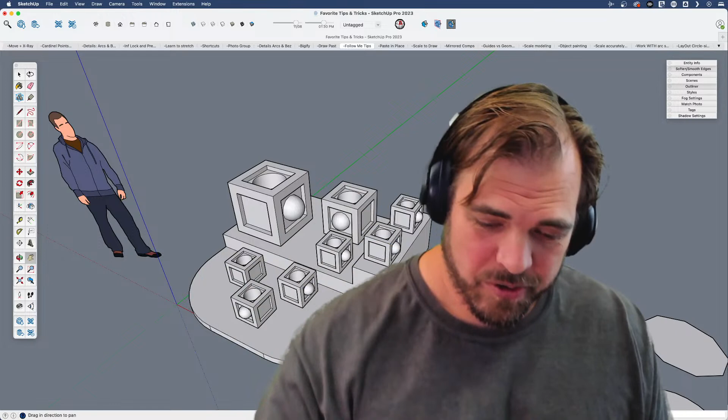And today, that's what we're going to try and do. We called this my favorite things. I started to try and list out a couple things that I thought, if you're self-taught, which many of us are, these are things that you might have missed, or if you've been using SketchUp a while, a lot of these will be familiar. A lot of these come up in the forums a fair amount, but hopefully there's a few tips in here that maybe are new to some of you out there.

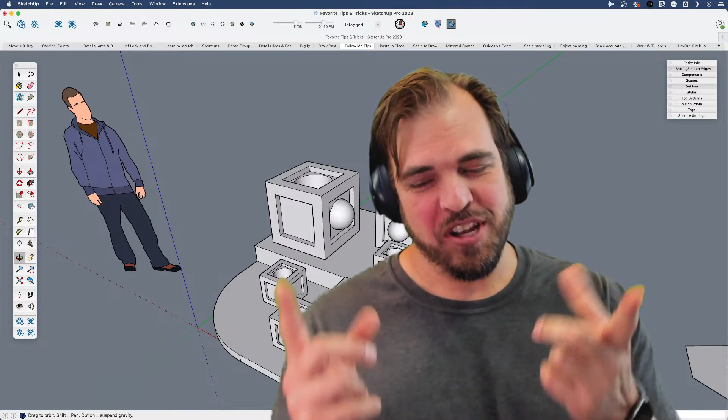You say self-taught, but this is a community where a lot of people can say that they're Tyson taught. So I'm sure we have a lot of those out there too. Well, thank you. That's kind of you. People are already asking if you intend to sing today. What are you talking about? You know, I may or may not have implied in the posts on the forums that you would sing your favorite things, and people would have to join the live to find out if that really happened. I have no voice like Maria. That would go poorly. Okay, so I won't promise singing, but I won't promise there won't be singing, if the mood strikes.

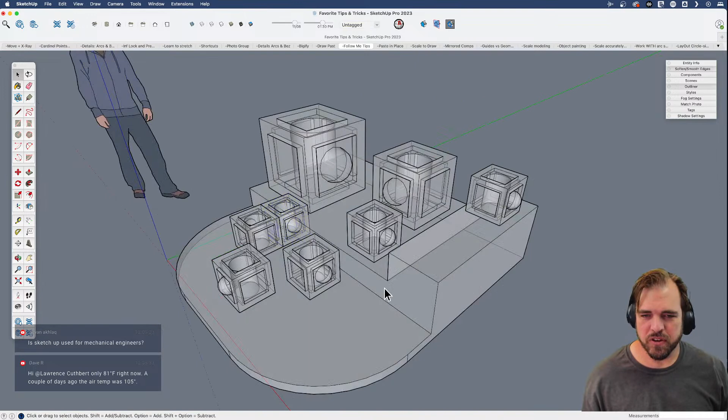A quick way to work around inference locking is to toggle X-ray mode. I've got this on a keyboard shortcut. If you toggle X-ray mode, it gets rid of that inferencing to a plane or preference for a plane, and you can just snap to anything, anywhere. That's the first tip that's really useful: have X-ray mode quick, easy access. You can snap anything anywhere and not have to worry about it getting caught up in the view. If I orbit, I might be able to get this to work, sort of, but X-ray mode will make that easy. That's tip number 1: turn X-ray mode on and off, especially when you're moving objects around.

Speaking of which, I have no segue for this. We got people coming at us from North Carolina, from Minnesota. One from a place I have not heard of before, so I'm probably going to say it wrong: Liège. Correct me if I'm wrong. We have people from Syria. The chat is just all over the place. We have a worldwide audience from Egypt as well, from the UK, across the pond as they say. We've got Houston, Texas, all over.

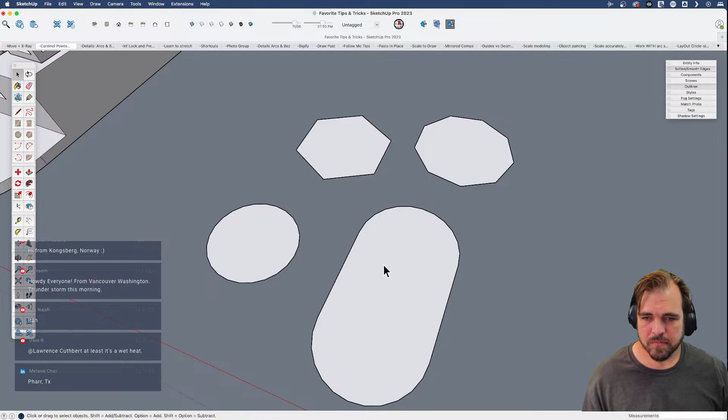Nice, thanks Donovan. Oh, Holland, Finland, Connecticut. You've got to reach, Tyson. That's so awesome. Yeah, well it really is. And I know you're not here for me, you're here for some good SketchUp stuff. Or apparently for Donovan, there's a big group of people here for your singing, so we can't count those people out. Oh man.

All right, so we're going to talk about cardinal points. This is one of those that, if you just learned to draw circles and arcs, you're like, cool, I can draw circles, maybe even change the number of segments, and you're familiar with that sort of thing, that's all well and good. Sometimes when you're just riffing and need to change the size of circles quickly, you'd have to get the scale tool or redraw a circle, but sometimes you can use what's called the cardinal points.

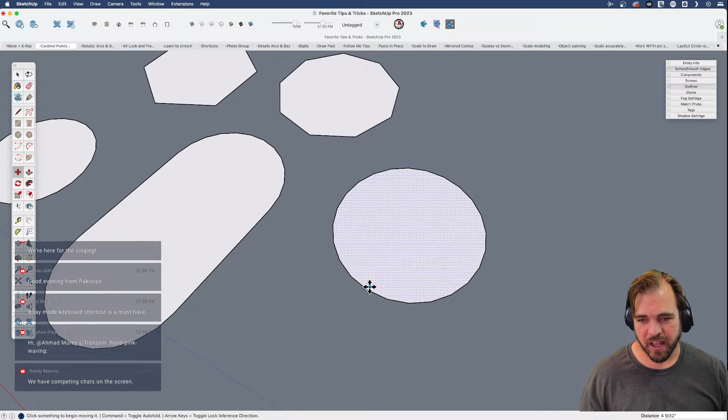If I hover over these polygons and circles with nothing selected, you see the entire circle is selected, but as I move around, there's a point where that blue highlighting disappears and I have just one point. That is the cardinal point. If you grab that point, you can actually resize a circle, an arc, or a polygon. If I grab this edge, it's going to move the whole thing, but if I keep moving around, a circle typically will have 4 cardinal points, one at each cardinal direction as you'd guess. Arcs will have 1, so I can resize these arcs.

Polygons, depending on the number of sides drawn, you may have to move around to find the one that will let you manipulate it, but you should still be able to find a point that lets you resize. You should be able to do this even if you've pulled some of these up into cylinders or objects. Using the move tool with nothing selected, if I have this circle selected and use the move tool, that's not going to allow me to resize this. So with nothing selected, as I hover around, I can create this as a cone. Over here, I could find the cardinal point between these two arcs because they're the same, see how it selects this line, and I could resize this whole face between the two arcs.

Somebody in the chat asks: when I select a circle and enlarge it, it becomes a polygon, how can I fix that? Say that again? When you enlarge a circle it becomes a polygon? Oh, the message says when I select circle and enlarge it, it becomes a polygon. How do I fix that?

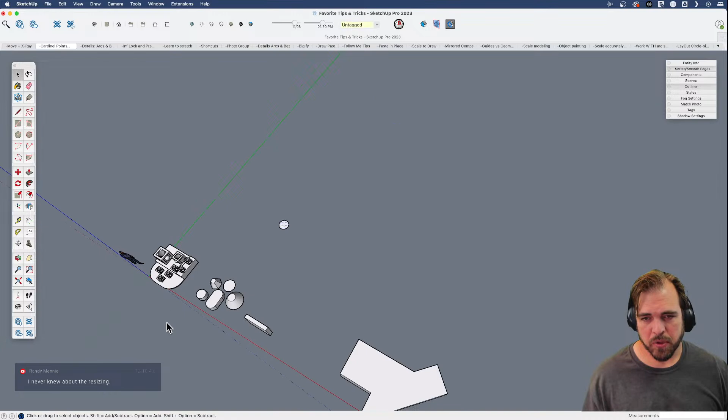So when I draw this circle, if I enlarge it, you'll find it's made up of a series of segments. That's true of anything, so you can change the number of segments. If you're trying to draw a circle that has more sides so it renders more as a full circle, by default it has 24 sides. As I'm drawing this, I could say I need that to have 60S, hit enter, and now it has 60 sides. The S is important, because if you just say 60 and hit enter, that's a radius of 60, but I was saying I want 60 sides.

I could also select this circle, go to entity info - and I haven't pulled it into anything - this only works on a flat circle, and say I need this segment count back to 30. Segment count in SketchUp is a critical thing to understand and work with. Don't work against it. Some people say there's no true circles, this is useless - not true, in many circumstances this works just fine.

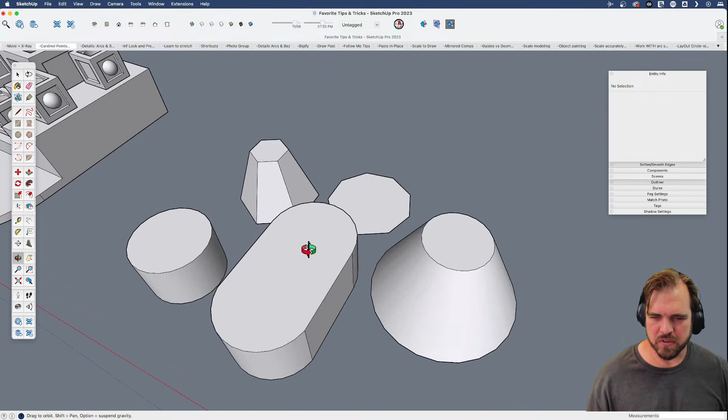Speaking of shortcut keys, since you're talking about shortcut keys, some people have chimed in to say what their shortcut keys are for specific things. What is your shortcut key for X-ray mode? Mine is Shift 5. I'm not going to justify it because everybody has their own logic. I'll explain shortly why that and a few others, why I chose those.

But yeah, shortcuts are fun. They're individualized. There's usually a good reason if you've customized them. I don't know the full story, but I know there's kind of an inside joke in SketchUp about how you use shortcut keys compared to everybody else. So I'm excited to hear the story behind some of these.

There's not a good story. I just have like 90% customized shortcut keys. I use very few of the default ones. Mostly that comes from an old habit of using other 3D software, and I translated them over. And half of it comes from often using a Wacom tablet, and I wanted to map all the navigation keys to the same spot.

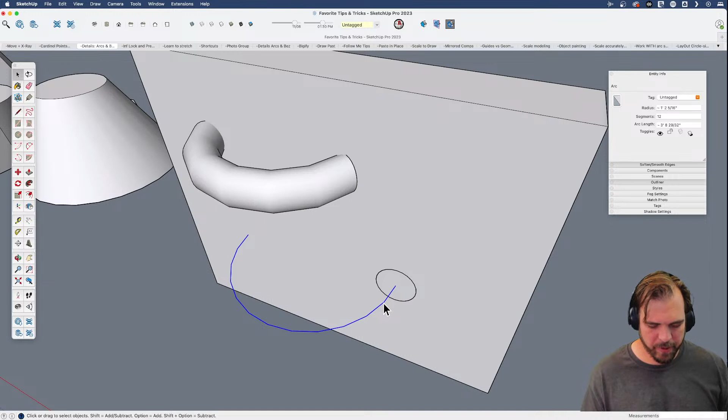The next thing we're going to talk about is Follow Me, and I did a skill builder on this fairly recently. If you're using it on a flat surface with an arc or often a Bezier or something, it's not going to meet up to that surface correctly. Let me undo, and we can see this, because essentially, even if we draw an arc, let me draw another arc.

I'll change the number of sides to say 30 sides, so it has a lot more sides than typical, because our default arc is 12. And I pull it out for a half circle. You're still going to have a little bit of a gap here, because this arc is not going to come in perpendicular, exactly perpendicular to the surface.

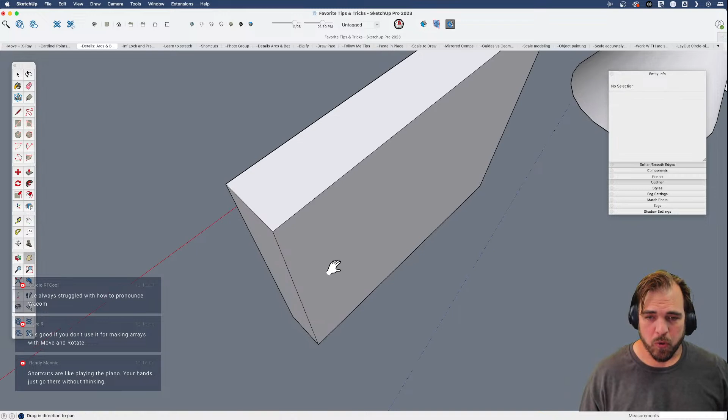It's always going to come in at a slight angle. So when you're drawing something coming from a flat surface, what you can do is draw just a little bit of a straight line. I'll copy that over, and that little bit of a straight line will give you the way to mesh correctly into a surface.

If you're drawing an arc and don't have room for that little straight line, just come in here, find the midpoint, and use that as your little bit of a way to get in there. That way your arc isn't bigger, but you can still draw in and meet up the wall. And like I say, that's true for Bezier curves as well - they'll come off at an angle, so it helps to have a little bit of a straight line to work with.

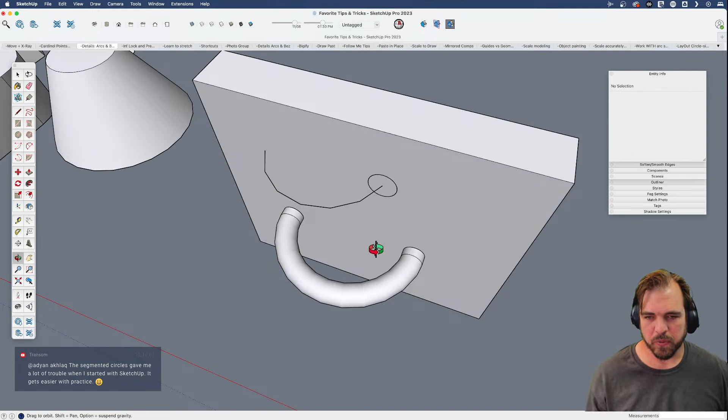Somebody in the comments said they've always struggled with how to pronounce Wacom. One of their reps told me: what do you do with the moles in the arcade? You whack them. So that's how you pronounce Wacom. I'll back you up on that, I've also talked to people who work at the company. Still, over the years I've pronounced it a variety of ways. I myself was in the Wacom camp for years until I met that rep, and now I have to remind myself, nope, it's Wacom.

Are you using a Wacom tablet right now, or is that something you don't use anymore? I don't tend to use it that frequently anymore, and I use a vertical mouse, which makes all the difference. I started using a Wacom tablet because of regular mouse issues, but the vertical mouse alleviates a lot of that. I do still love using a Wacom tablet though.

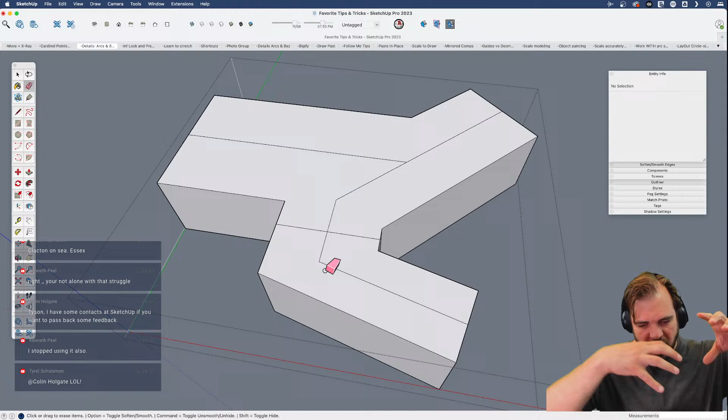The next tip isn't so much a tip as something we'll just go through. If you're new to SketchUp and new to the inferencing engine, one of the most helpful things is to draw a random shape, say this is a house, and draw some of the parts of the house off axis like this, then resolve the roof. This is just inferencing and inference locking practice.

Just to back up a bit, I was drawing this while we were talking about Wacom. This won't be a great resolution, but that's part of the point, since we just want to resolve whatever it's going to be. So I'll draw this, find the parallel over here, draw from this midpoint, find this, lock it and draw somewhere back here. I need a midpoint here, so I'll draw a line and then draw this line.

I'll hold the shift key to lock it, then touch this edge so it lines up there, and draw back to here. Then I'll draw a line from there and erase it to merge it, extending this one past the edge. That's one of the tips we're going to talk about too - I love just drawing past an edge and using the eraser to clean it up. It's a fast way to work. Now let's draw in a couple ridge lines.

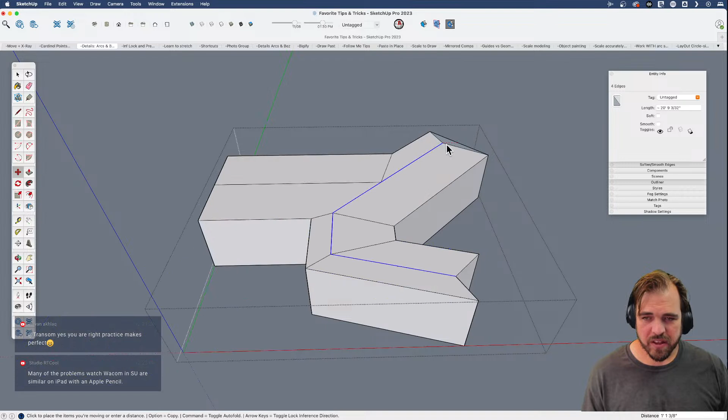Erase these and see what we get. Select these edges, use the move tool, find the blue direction. It's okay, this is kind of messy, but that's the point - some of it worked, some of it didn't. It could actually work if I select this one too, since I'd forgotten it. That's a little better. But I'm not going to worry about roof pitch or anything - the whole point is to now fix some of this roof.

So I'll use inference locking. Lock back here, then I can erase that. Because of this weird way we did this, we've got this weird triangle. If we needed that pitched, how would we go about that? Let's just find where the intersections are. I'll start an edge here, hover over this roof, hold the shift key, and now I'm locked to that surface. I'll draw some random shape while still holding shift, which keeps me locked to that surface, and do the same thing over here.

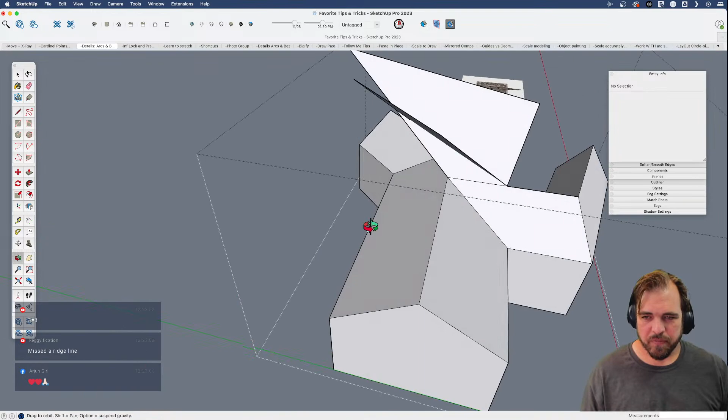Find that blue on face, lock it, and come back to here. That will give me those two intersections. And actually, with this third one, we should be able to just find where it all ends up. Interesting, I would never have thought about doing this like this. I'm not saying it's the best way.

This is just a way to practice inferencing, inference locking, you can lock. For those curious, yes, I fall in the newer to SketchUp camp, whereas Tyson falls into the boring old guy, very professional camp of SketchUp users. This is one of those things where you do an exercise one way and then think, could I do it differently? I'm not sure, but I'll try. That's why I like doing random roofs as practice for inference locking.

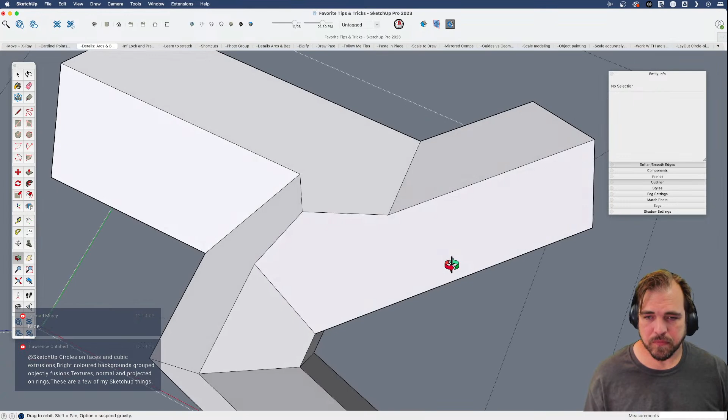If we have a little bit of leftover geometry in here, another useful thing for X-ray mode. Let's do a little bit more.

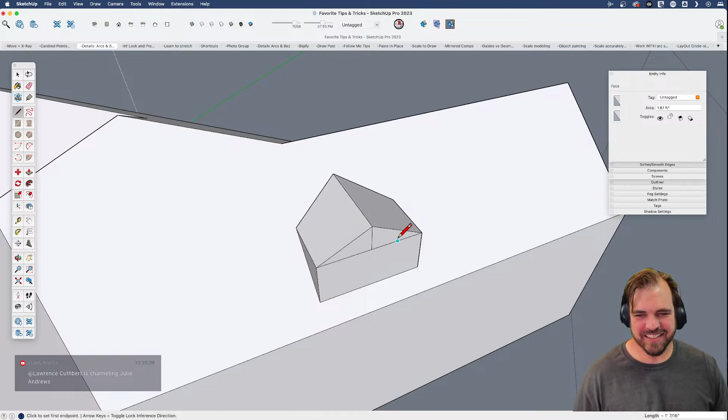Lawrence in the chat, this is fantastic. He wrote his own lyrics to SketchUp's favorite things. This is so great: circles on faces and cubic extrusions, bright colored backgrounds, grouped objectly fusions, textures normal and projected on rings. These are a few of my guess would be favorite SketchUp things. I hope I enunciated that right, that's fantastic. I tried to come up with a little jingle of what I thought the SketchUp lyrics for that song should be. You won, those are fantastic. Nice. Wow, normal and projected on rings. Okay, textures normal and projected on rings, these are my favorite SketchUp things. So choice, chef's kiss, Lawrence. Fantastic, that is fun.

All right, let's see if we can get that to weld in. Okay, all right, so we've drawn a little dormer. Again, a nice exercise. Down here, we'll draw.

Here's another sub tip while dealing with inferencing that many of you will know. When selecting a path for follow me, often if you don't want the whole surface, the best way to select just the edges is to double click on a surface, then hold the deselect modifier and get rid of the edges and surface you don't want. So I want all of this except for this side because I'm going to do something different this way. It's just a quick way to grab edges, as opposed to that, which is not slow, but that's a quick way to grab some edges: double click and then deselect what you don't want. Sometimes that's faster.

So take that, offset. Let's move this whole doorway so that it's in line with this dormer. But what would we do? We can hover over this edge, because again, this is not on the axis. So I'm going to hover over this edge, hold the shift key. Now I'm locked to it, and then I can pick anywhere on this door and line it up exactly.

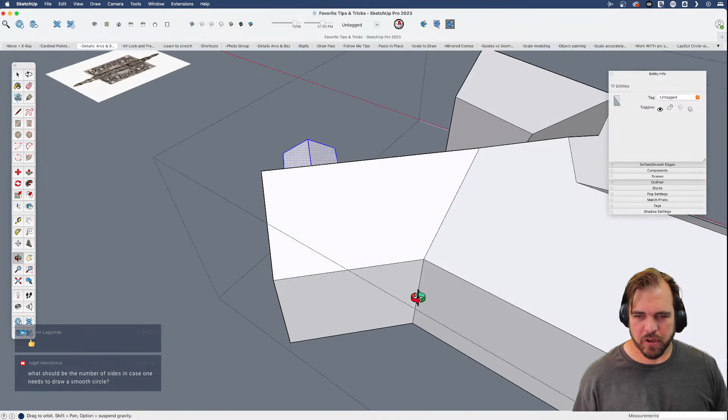Let's say we're drawing, I'm going to grab this and move it, but I'll lock it so that we're moving. Over here, we're going to do the same thing, create a door. But here, if I'm trying to line up with this dormer over here, I can do what I just did. So I've locked to this edge, then I click on this point to start moving it, but I've got the shift key held down to lock this.

Because I was so used to using the shift key, I created a whole bunch of shortcut keys associated with it. So while I'm locked, I hit 5 and I hit X-ray mode, or I hit 1 - this won't do anything right now, I'll show something else - and it'll toggle hidden geometry or hide rest of model or similar things. I used all of these common in component editing. So shift 1 is hidden geometry, shift 2 is hide similar components, shift 3 is hide rest of model, shift 4 is close components, shift 5 is X-ray mode, stuff like that. I did that so while I'm locked like this, I can easily toggle those other aspects on and off and stay locked. That's why. See, now I understand. This is great.

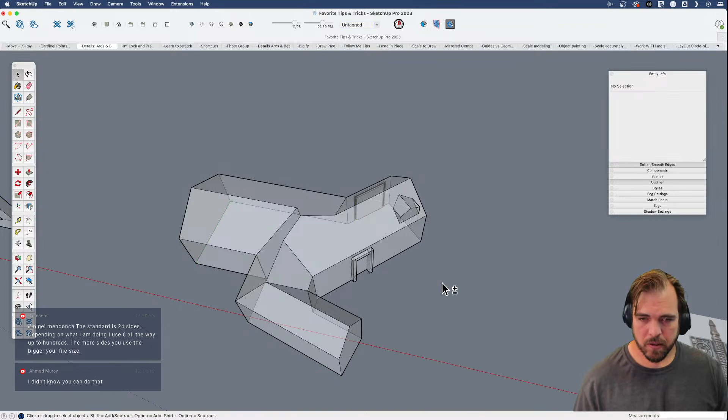Again, different workflows; people who are more comfortable using the arrow keys may not find that. But for me, because I'm so used to using the shift key for locking for most of what I do, I just found it very useful to associate some of these things with the shift key. So that is that. Oh yeah, and we've basically covered this.

Another useful thing in SketchUp, if you haven't done so already, is make sure you...

Oh no! No, that's for cowards. I see you also like to live dangerously. Learn how to select. Granted, with what you're doing, I don't think it's totally imperative that we save the model. Correct? I saved this model from the start. So, no, we're safe. We're safe. Okay. I don't want to have to go again. Saving is for cowards. Yeah. That needs to be a shirt for Aaron right there. Oh, and I count myself a coward. Of course I love saves.

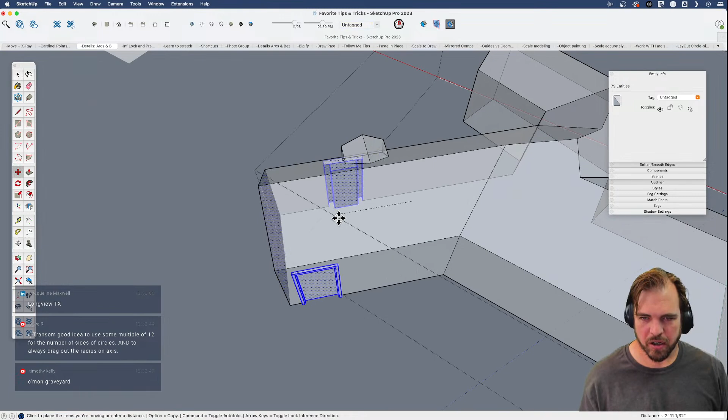Learn to stretch geometry. Learn what you can select and how you can move geometry and manipulate geometry in line with other geometry. And you want to do that plus this surface plus this door, but leave the dormer there, right? So that's another one of those things: you can manipulate a lot of geometry if you learn to make a good selection and how you can stretch at least along straight edges.

Okay. Oh, I don't know if you have this in your upcoming arsenal of favorite things, but a comment came in about graveyards. So if you weren't going to talk about graveyards, when we get back here to paste in place, I'll own up to my graveyard habit. All right. Graveyards. That is definitely one of my favorite things. That's a good call out.

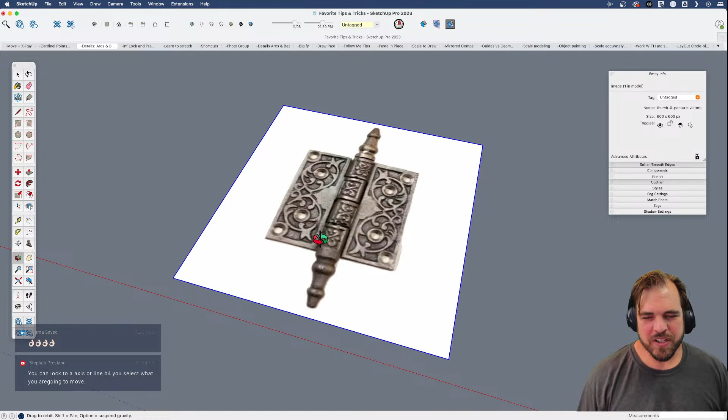If you're new around here and you don't know what the term graveyard means, we'll call it a term of endearment for my habit of copying geometry, making iterations, and then changing my mind. So making a new iteration and changing my mind and making a new iteration. And by the end of it, I've got like 10 versions all in the same model. So I've got a graveyard of changes, which is messy, and you walk away from it, and a week later you come back and you're like, what was I even doing? I don't know which is the current file. I don't know which changes are the most recent. And you're in trouble, but that's a graveyard.

Oh, I was thinking something else. Maybe boneyards? What I thought is you have all of these shapes in a model, but you make a copy of that or a component and you lay it out on a flat surface somewhere, like behind the model or beside the model. So if you need to go in and make changes to a particular component, you could find it in the graveyard or the boneyard. Am I thinking of a totally different thing, or are we talking about the same thing?

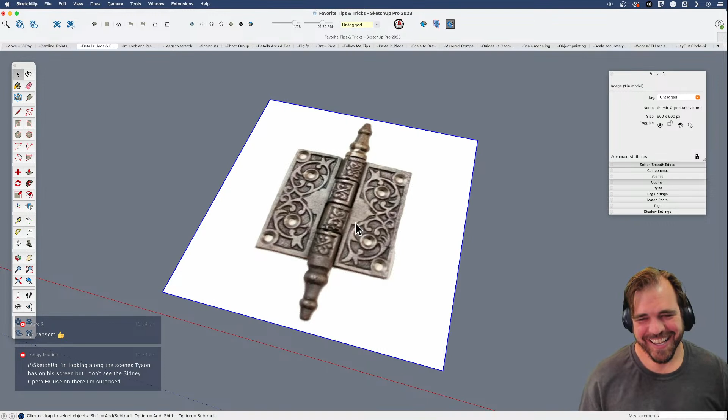No, I think you're thinking of something different, and I think that is useful if you're making an assembly and you just want all your pieces easily accessible. I mean, you could find them in the component browser, but if you just had a whole bunch of greeblies or something. But no, I suspect, at least in reference to previous stuff that we've done, my graveyard is my bad habit of leaving all my changes along the way. Gotcha. Yeah, that's just that for me at least.

This tip is when you bring an image in. I just drag images in, and I don't import them as photos, but it's doing the same thing. If somebody knows differently, if there's an advantage to importing, you can import images as photo match, as textures, as an image. When I'm doing a reference image, I will just drag the image in, which is the same as importing as an image.

Here's the thing: when you import as an image, though, I want to trace over this, and I don't want this part of it to get in the way. And I've got a lot of space to work on this one, but sometimes you don't, and so you're manipulating your model, and then you accidentally erase your reference image.

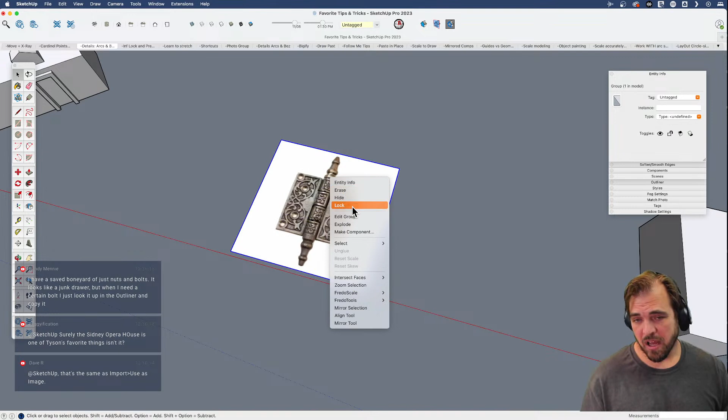So it's nice to be able to lock this image, but if you bring it in, you cannot lock it as is. So one of the things that you might try is you say, well, that's fine, I can explode this. And now it's exploded into the geometry with this texture applied to it. And I'll just group this. And then as that group, I can lock it. Perfect, right? Now I can't erase it. I set that up. Don't do it this way. We're going to show you a better way.

But the problem for doing it this way, so now I'm going to group my geometry. I'm going to come in. As soon as I edit my group, textures go away. And this is true even of other textures in the model. And this is in shaded with texture display mode. But if I came in and applied some texture on here, whatever it may be, as soon as I edit this group, textures go away. But I want that reference.

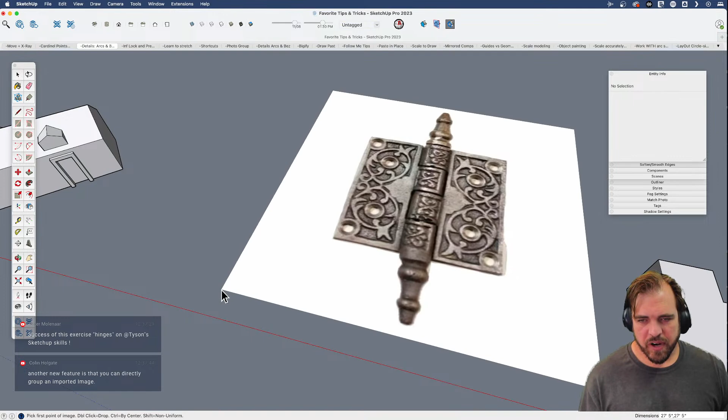So here's what you do instead. Don't explode it. We'll just get rid of all of this. Let me unlock it. Get rid of this. When I bring an image in for reference, like this, I just group it. So I'll just draw another line over here, totally discard it, like it's not necessary. Sometimes if I'm mirroring something, I'll draw a line across and select those two. Doesn't matter. As long as you have one little extra piece of geometry, you can group those together.

And now that it's a group, I can lock it. But I never exploded it. It's not texture. It's still an imported photo. And so now when I come in and I make this group and I come in to edit the group, it retains the photo. And I love doing it this way. Then I turn X-ray mode on and I have this really nice view for tracing with the image preserved, but locked. So I can't erase it either. Hope that makes sense. I've shared that one before too.

So like I say, reference image, don't explode it, just group it with any other piece of geometry, and as a group and as an unexploded photo, it will still show up when you're editing other groups and components.

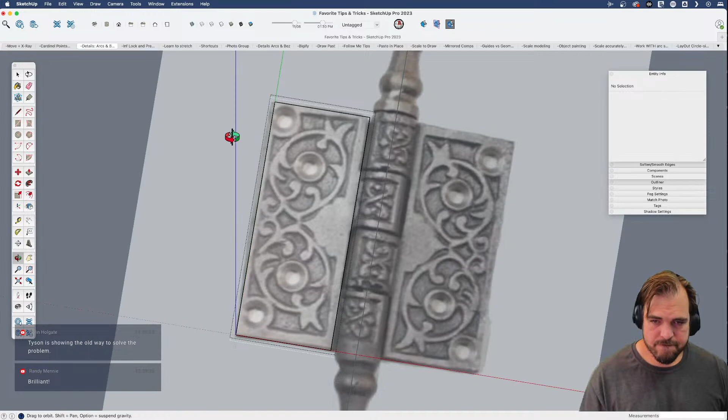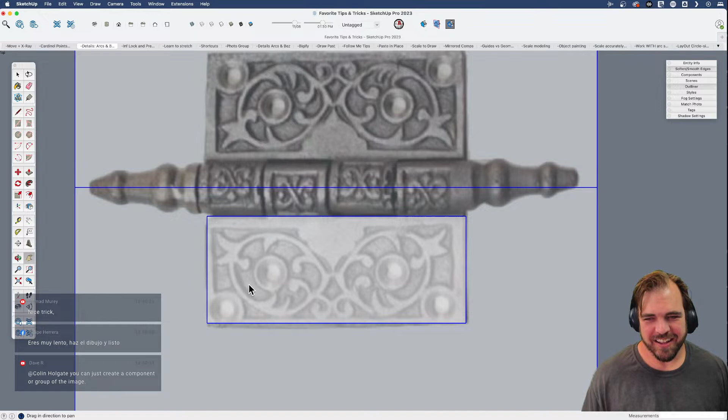There may be a story behind this, but there's the comments in the chat about the Sydney Opera House. And surely the Sydney Opera House is one of Tyson's favorite things. I'm assuming that's in jest? You mean like Notre Dame is one of Aaron's favorite things? Peggy says, surely the Sydney Opera House is one of Tyson's favorite things, isn't it? Peggy, I thought we were friends. You know what? No, it's not, and I will never do it again. But we did it once, and I'm pleased that we at least did it once. But no, it's not one of my favorite things. You never want to model the Sydney Opera House live in SketchUp again. That is not an easy thing to do. But I mean, yeah, no, absolutely. My favorite thing, my favorite.

Okay, well, let's throw it out there. What are some of the memorable lives that have occurred? They're probably the most memorable ones, or the most difficult, the most dramatically failed ones. But I don't know. What do you guys? What were some decent lives that we've done in the past, if any come to mind? We've done so many. Do we have a count for what the total number of lives is that we've done on this channel so far? I don't know, but we've done them. I started joining 2 or 3 years ago, and Aaron was doing them before that, so we've got like 5 years worth.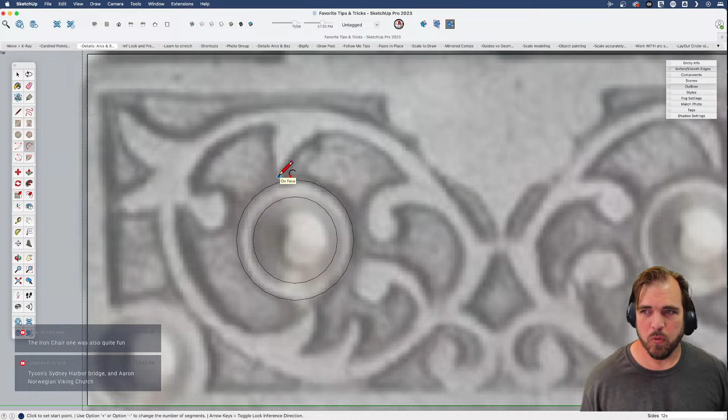The Sydney Bridge. Oh man. That was my first. No, it wasn't my first. That was an early one for me though. Woo. The Eiffel Tower. That was back when I was more naive and thought I could get more done in the time than I could. In 2 hours. Yeah. Is the bridge that they're talking about that weird suspension bridge? It's the Sydney Harbor Bridge. It's right by the Sydney Opera House. I don't know what else to refer to it as.

Okay. Somebody says the iron chair was really fun. Oh, Aaron did the Game of Thrones chair. I think that's probably what that reference is. Somebody else chimed in saying the Norwegian Viking church. That was a cool one, like Stave Church something. That's an Aaron. Yep. Nice.

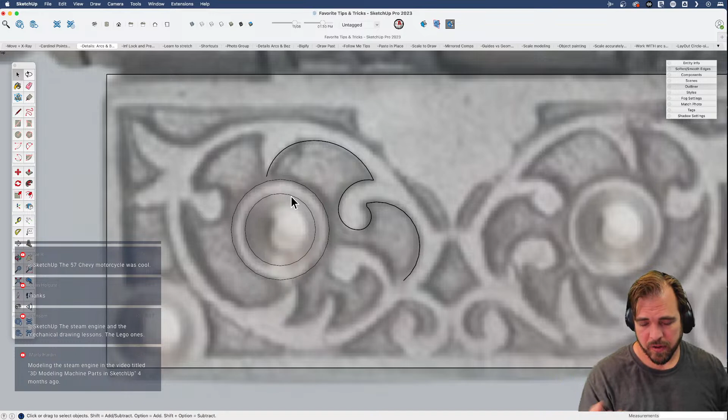I'd love to hear some more, but what I'm doing with this was just to show when you're drawing details, a lot of curving details. It may not be installed by default. I don't remember if it is or not. I think I went and grabbed it. But there's some really powerful Bezier tools out there. Fredo's created some. I haven't wrapped my head around those. I think you can go back and edit those. So if this was something you did a lot, it would be worth looking into some extensions.

But the native Bezier extension from the SketchUp team, aside from just arcs, is really great, and I just got a shortcut here, because with arcs, you have to be careful that you're not creating arcs at a point that you can't. I could not, with our arc tools, accurately represent this because it's kind of two arcs, not one. So I would do this portion, and then I'd have to come in and do a little thing here, especially if you want continuous smooth curves. The Bezier tool, draw a Bezier curve. Again, it's SketchUp created.

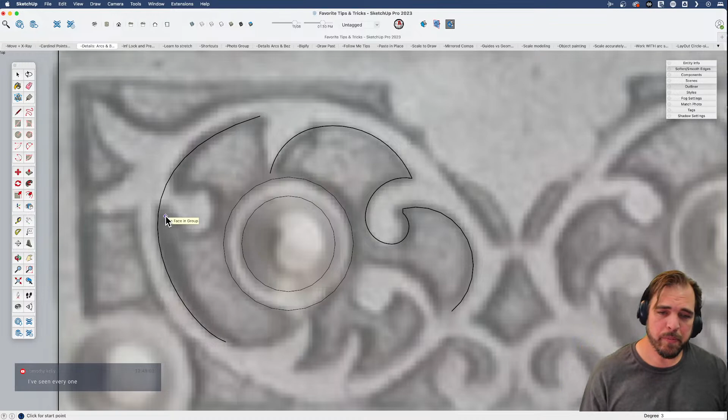But you might need to install the extension. I apologize, I don't remember. But with that, I could come in and draw more complex curves that might meet this better than the native arc tools. And the thing to remember about this too is when I'm drawing this Bezier curve, I will start in here and be like, okay, that's the curve I want. But by default, there's different points of control, and I have these 3 points of control. I'm like, this last one's tripping me up.

Keep in mind with the Bezier tool, this degree down here, I can be drawing and be like, oh, I want just that one. I just want to create the 2 points and 1 degree of control, or 2. I don't know actually what this means, but I'm going to change it to 2, and that way when I draw this Bezier, I'm just using 1 point here to draw it instead of coming out this way, coming out this way. That's useful for other reasons, but the Bezier tool is another great tool for creating some arcs that are not exactly perfect curves tangent to both ends. So when drawing some details like this, remember that the Bezier tools are your friend as well.

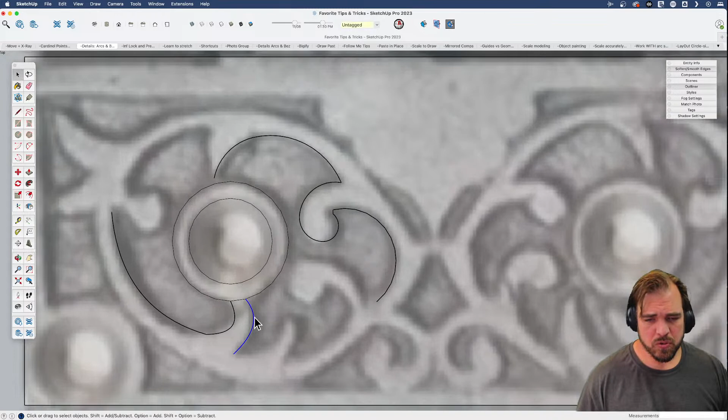Also with arcs, one of the downsides of the Bezier tool is you can't control the number of segments, because if you're drawing this with arcs, you always have to keep in mind that this is something very small, but if I need to turn this corner, well, this arc certainly doesn't need to be 12 sides. So then I just arc 5, then coming up, whatever it is. And then maybe this one is going to be 8 sides. It's always just a best guess, but with the Bezier tool, I believe it's 20 sides every time, no matter what. So just one of those things. Personal preference.

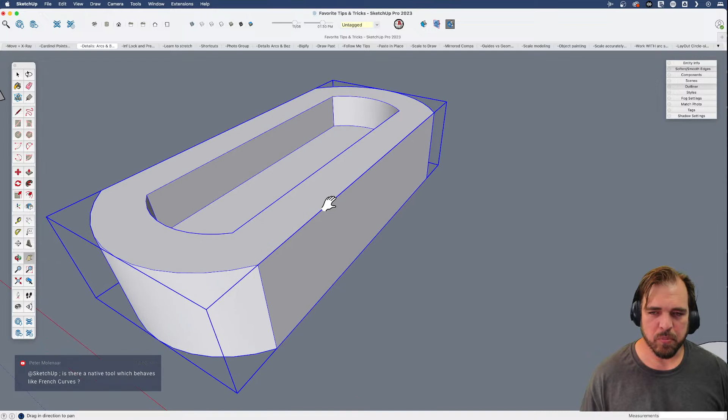All right. Let's get back. Some people are chiming in with other votes for their favorite live. Yeah. Your lightsaber. That one. Oh, I haven't done. Was a pretty one too. Ty, our very own Ty, chimed in to say that he was the guest host for the scale figure video. So whoever called that guest host out, that would be Ty. And then we have a couple of people that actually voted for the Steam engine. Mechanical drawing lessons from the Steam engine. The Lego one. What? Okay. Well, Aaron's done mechanical drawings a couple times, but I guess specifically the Steam engine. Very cool. Somebody talked about the animated trench run from Star Wars. That one was fun. I need to learn some better animation tools so we can do that one even better.

Peter from the chat is asking, is there a native tool which behaves like French curves? The Bezier tool is going to be the closest one. I showed how we can draw Bezier, one direction, 2. You can actually draw a Bezier with more. I could turn the degrees up to 4. And I've got 1, 2, 3 points of control. So experiment with that. If you really want a lot of control and the ability to go back and manipulate a curve, look into Fredo's.

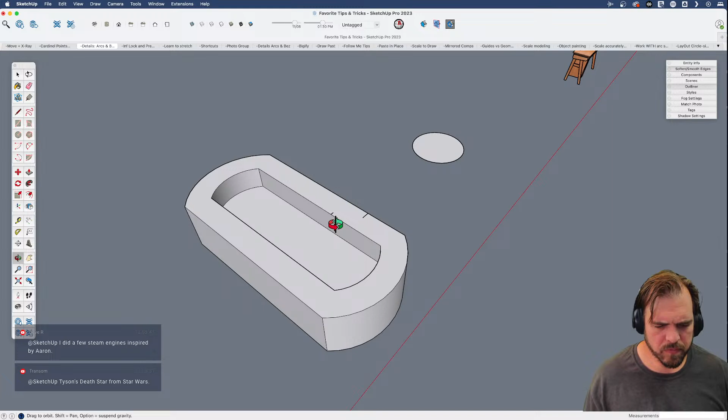Help me out there. Is it Curvizard? Fredo's. It might just be his Bezier tools. Somebody in the audience will know. But there is a more powerful one. It's much more technical to use. Yeah, I have to make a confession around that. I have not used any extensions in SketchUp. I don't know if that's a good thing or a bad thing, but I have not delved into the world of SketchUp extensions. That's the deep end of the pool for me. Well, Bezier Spline and Bezier Fredo Spline. Fredo Spline. Thank you. So check those out. Excellent.

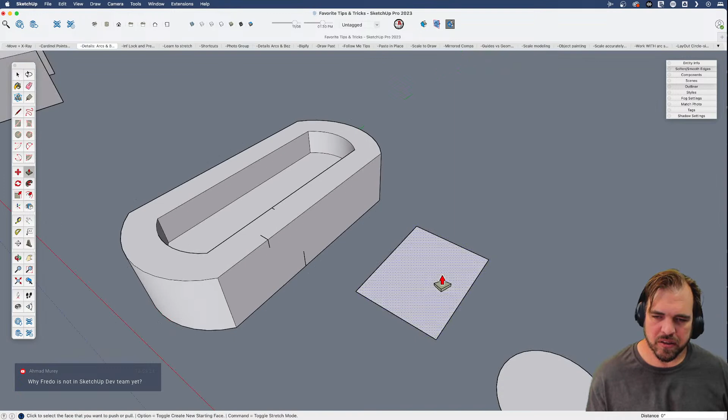This one, what I'm setting up here is a reminder, this was a skill builder recently. Sometimes you have a shape where you don't have an obvious place to put a follow me shape inside, right? So follow me, we need the path, we need the shape. But in this case, unlike something like this, where we say, well, the chamfer corner can just go right here. That's nice and simple. On this one, we didn't have any flat shape to do that with. You can still create it, and what we need to do is just draw.

So I will hide a surface or two and draw the shape I need. And then if I unhide these, I'm going to hide this one. And again, I'm not deleting it, I'm hiding it, which for me is a keyboard shortcut. That way I can unhide it in a moment. But I'm going to select this top surface, go to follow me, click here.

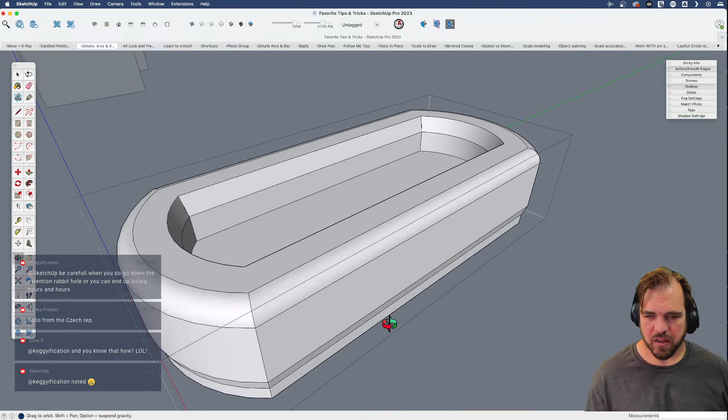So then it created that chamfer. I'm going to select it again, follow me, click here, created that one. I'll select maybe this bottom one, follow me, click. So I've created all of these, and then I'm going to unhide that surface I hid just so I could see my shapes.

But again, if you're creating objects that have some curves and you don't have a good place to create a starting point for the follow me tool, draw your shape, put it into place, and then sometimes you can hide one of the surfaces to allow you to select another path and still use your follow me tool. So let me know if that makes sense.

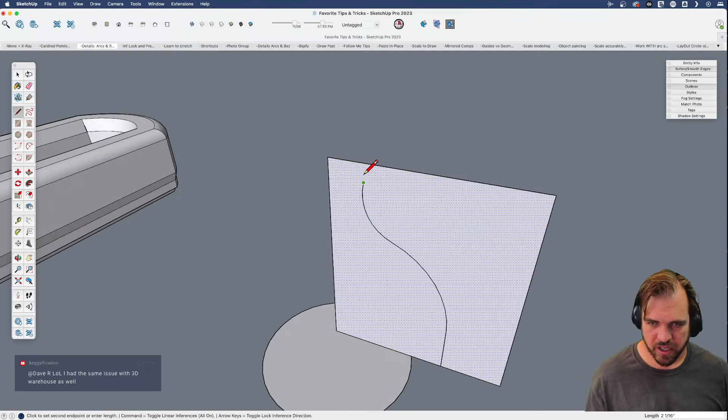This one is one that I talked about a lot, Eric's talked about. If ever you're doing a complex shape, especially one that's going to involve arcs, you need a throwaway shape to work on. Drawing arcs out just in the free space, it's so tricky to do. It's really hard. There's no need to do it because you can just draw a throwaway surface.

And create your more complex shapes, and then you're good to go. Oops, I didn't create an opening.

This one I've shown a little bit before. This is one of those things too. I could bother, I just love being able to draw past and erasing. Draw past, and then erase. Anyway.

So that's follow me.

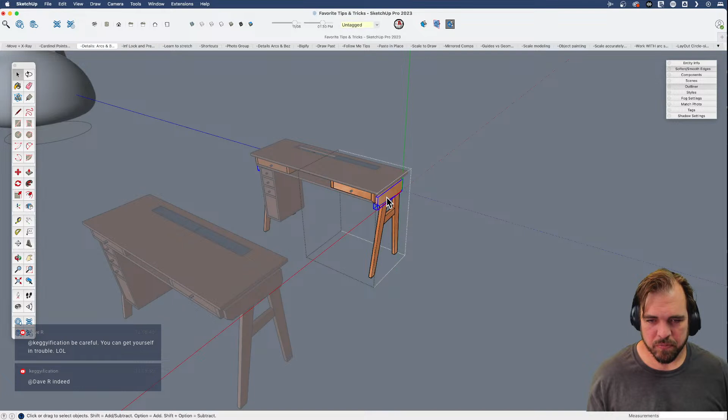Paste in place. This is where, because this is where I will come in and be like, okay, I want to make changes. So I will come in and I will try to remember to make, right, this is components, or actually it's groups or something. This is my bad group and component behavior. But I want to make this unique and then come in and make some changes. But I don't always remember to make something unique. So I'll make a copy then, make some changes.

I forgot to make this unique. And I make some changes here. Extend this out to here. Extend this one. Using locking to keep that angle. And...

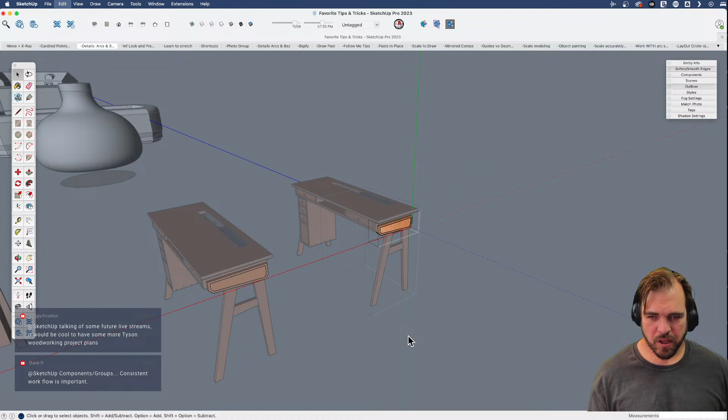Then I come back and I'm like, I didn't make it unique. I was just exploring a change. I didn't want that to change. So that's when you take something, copy it, undo it, and then paste it in place. Edit, paste in place, or paste in place. And because we had copied it and because of the changes, it makes this as a new component.

This is also really useful, not just for fixing when you mess up your component behavior. This also is just very useful when I want to draw some geometry first.

Speaking of that model you're working on, somebody chimed into the comments talking about future live streams. It will be cool to see some more of Tyson's woodworking project plans.

Thank you. I did build this out. I built this desk for my daughter. This one came to life. Most of them don't come to life. Most of them overwhelmingly don't come to life. This one actually did, and it was so cool.

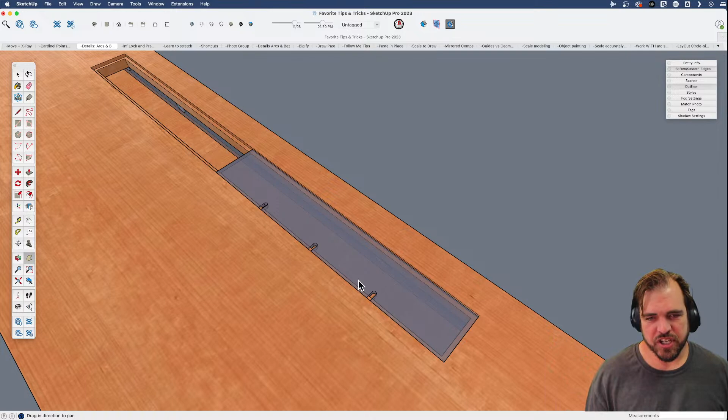Was that a COVID desk? It was, it was a COVID desk. Yeah, I did build in as well this upper area that has semi-storage, but I also put a sound, whatever the right term is, an LED strip that goes in here that responds to sound. So you can change the colors, or you can just play music and it will start pumping out different colors. And then it's also open down here, so the colors. So it's very fun.

Just as a side note, let me hide this. I do this a lot where I'll make a change, something like this, and then I'm going to cut it out, come inside the component and paste it. So paste in place, many of you will know this already. It's so useful either for correcting mistakes or drawing something outside of one context and then dropping it into that context.

While we're here, while we're on this one, I'm going to delete this. Another thing that I tend to do, and this can get you into trouble, but is, again, when I'm just iterating really fast, I like to make mirrored components, especially of furniture.

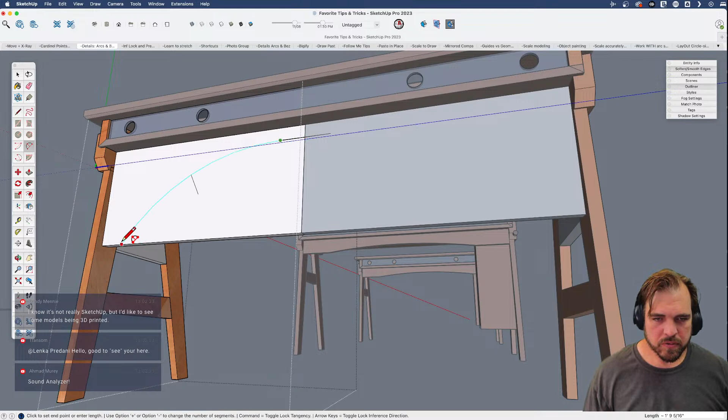And then to visualize it correctly, if you have, so I'm going to... these are two different components, but I want them to read as one. I want this to read as one panel. You can go into your component, select those interior edges, and hide them.

Right? You can't delete them, or that would remove geometry, but you can hide interior edges and then create a seamless sort of version in the middle. So anytime you're using mirrored components, you can hide interior edges and create a visual one piece.

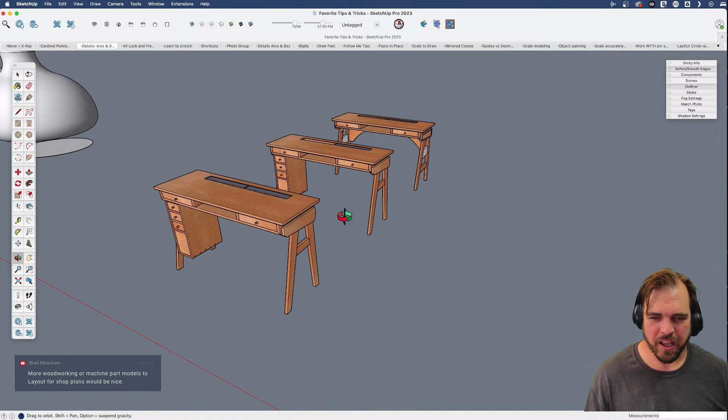This, Donovan, is my graveyard. I have this on so many of my projects where I make a change, and then I make a change, and I make a change. And I come back and I don't know which one is the most recent, I don't know which one I like. That's my graveyard. It's like an adventure in your own models.

Some people are chiming up in the chat saying, I know it's not really SketchUp, but I would like to see some models being 3D printed.

I think we've done a live about things being laser cut, correct? We did do a laser cut live. And we're actually going to do that again because we have a different laser cutter at work we want to showcase, since it'll be a bit of a different workflow.

For 3D printing, we can model for it and send it to the 3D printer, and we can talk about slicer settings, but that gets out of the realm. And anyone who knows this knows we cannot 3D print in real time. We might be able to finish something small, like a tiny dice. Or do it like those 30-minute cooking shows where we have a finished model ahead of time.

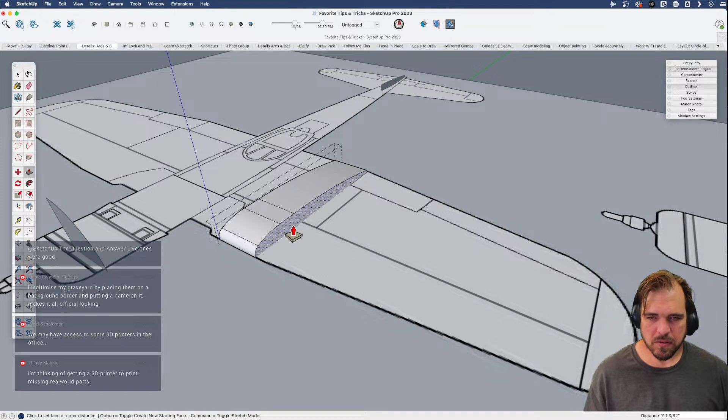We definitely can talk about considerations for 3D printing, and Aaron has written a book recently on just that. So if you want his best expertise, there's a book out there he's written. For those who don't know, Aaron is becoming a more prolific author in terms of SketchUp, so if you haven't seen already, there are a few books he's written that can help you in your SketchUp journey. I'll plug Aaron's book, go get it, help support Aaron. He's a good guy, we like him. Most days.

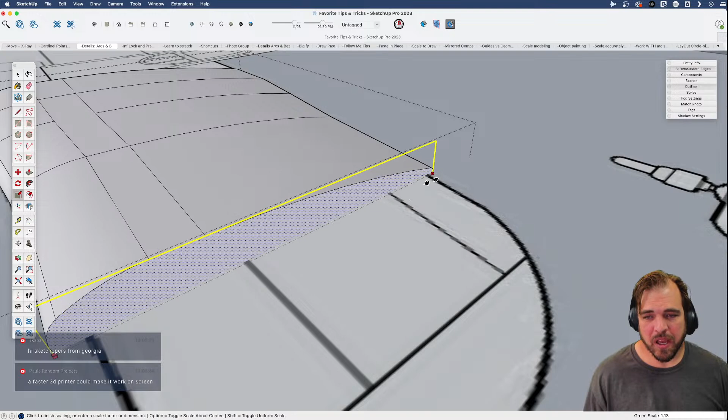Somebody chimed in saying question and answer lives, so let's entertain that for a second. I think that'd be great to do, I think we'd be game to do it. This isn't pure cynicism, but this has actually happened a few times: you do it, and then the question is, hey, how would you model the Sydney Opera House? And the answer is, I don't know, we can't do that. So as long as we get questions within the realm of stuff we can answer in 10 minutes, I love the idea, but sometimes we have to set the right expectations. Or we could just gather all the questions ahead of time and sit and answer them. That would be a good live to get everybody on the team on, right? It would be, potentially, we could hand it back and forth. I'd be curious if anybody has examples of what they would ask.

Ty jumped in and said we may have access to some 3D printers in the office. We do, we do.

Since Ty is with us, Ty is our scale figure still for the SketchUp for Web version. I don't know if there's a different version for the paid or free version, I don't know. I saw the weirdest thing on some SketchUp Reddit post recently where they're like, what's with the SketchUp team, what's going on here, and I couldn't reference it, they were showing this picture of Ty and I couldn't understand what the reference was.

Ty is wearing a shirt that's like an inside joke. Have you seen it, Donovan? You'll surely know the reference. Are you talking about the dinosaurs? Talking about the dinosaurs. Yes, I know the reference. Does anybody out there not know the reference? I almost want to bring it up. If you go to SketchUp for the Web, our good friend Ty is wearing a shirt with a Tyrannosaurus and a Stegosaurus, I believe. A nice little movie reference.

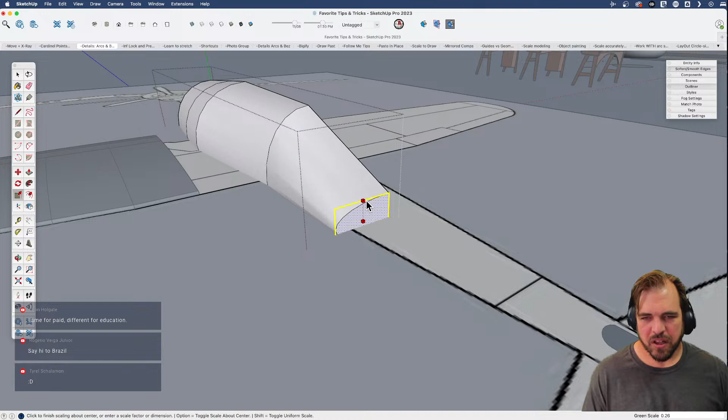And sometimes, like I'm doing here, you want to make sure and preserve that inside, because I would just mirror this. But the scale modeling method, if you haven't tried it, give it a try. So I will leave it at that. You know, scale modeling.

Speaking of mirroring, I do have to say personally, one of my favorite things recently is the mirror tool. I love it. Right now I'm working on a playhouse that's pretty good fodder for the mirroring tool, because it's pretty uniform in terms of shape, design, and accents. So I find myself more and more often using that mirroring tool and being so glad we have it, because it's come in handy quite a few times recently.

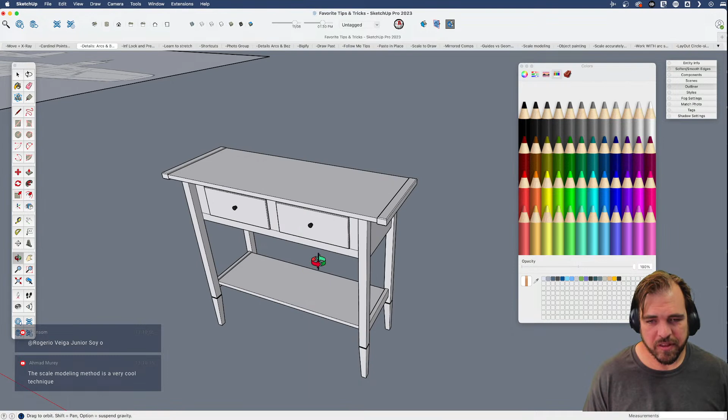I love it too, man. Agreed. That is a recent tool that I think they implemented really well. Totally agreed.

This one is just a thing to be aware of. When you're painting colors or materials in SketchUp, if you've used it, hopefully you know that everything in your model—and to me this isn't one of those could-or-couldn't, take-it-or-leave-it rules, this is a super fundamental always rule—needs to be grouped into an object, object being the generic term for group or component, one of the two.

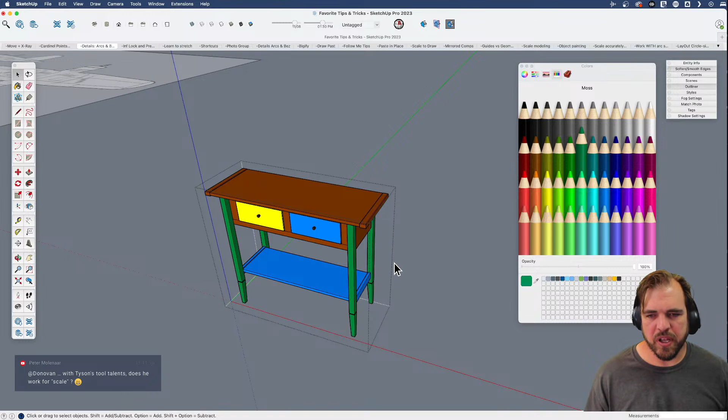You can paint objects. So I could paint all these different things. If I select all these and then group them into one larger piece of furniture, which I could do, and then go to paint this blue, only some of the stuff turns blue. And if I come in and this is already painted, but I paint it green, all of a sudden all these things turn green. This is one of those things that once you've wrapped your head around the nature of objects and components, it makes sense.

But it can get really confusing, because you can paint the container and you can paint surfaces. And when you have multiple nested groups and components, you can really get confusing about where your paint is—is it on the outer component? If I select this whole thing and go to entity info, it shows this group is blue, even though some of these colors are inside. If I go inside here and select this, it shows this group brown. This one still shows as brown, the original color, even though now we've painted it green.

I'm not going to say there are some people who will say you should never, ever paint the outer container—I'm not going to suggest that should never happen. Just know what you're doing. Especially if you hand models back and forth on a team, have some sort of rule—either we only paint surfaces, or we only paint one level deep—because it gets confusing when you select something, paint the surface, and now it's different versus the container.

We used to think that if this is a component, you could create and paint the container of the component something different. We used to show that as a way where, hey, you can keep the component behavior but have different materials showing. I think that's confusing too. Just be aware of it—I'm not going to say how you should do it, just that it's one of those things to be aware of.

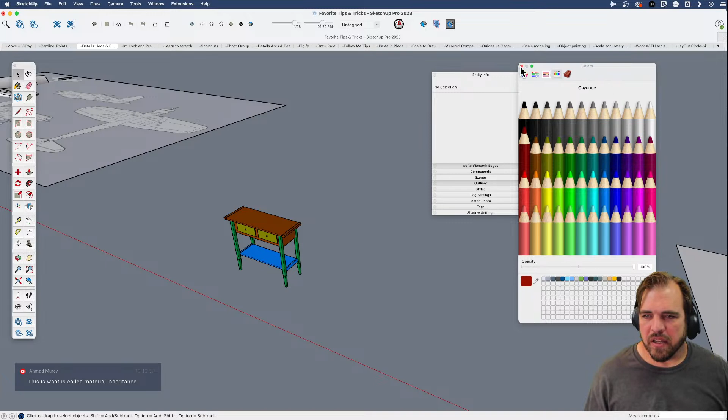All right, yeah, I do have to make a correction—got called out in the chat. It is not the mirror tool, it is the flip tool. You and I both stand corrected, because I was agreeing with you. We do.

This next one—I wish, as we go through these examples, some of them are very generic because this stuff just comes up, and it's hard to know when it may or may not be useful. This one's a very generic example: sometimes you've drawn shapes, not necessarily circles, but something you're trying to scale, and the scale tool works on a percentage.

If you go out there, you can find tips and tricks for using scale more precisely. This is a simple one: if I want to scale but need to keep the circle as a circle, and scale it to these lines I've just drawn, just remember you can tap the shift key to scale uniformly. So I could scale it, and as long as I scale from one of the ends, I can make this accurate to some reference edges.

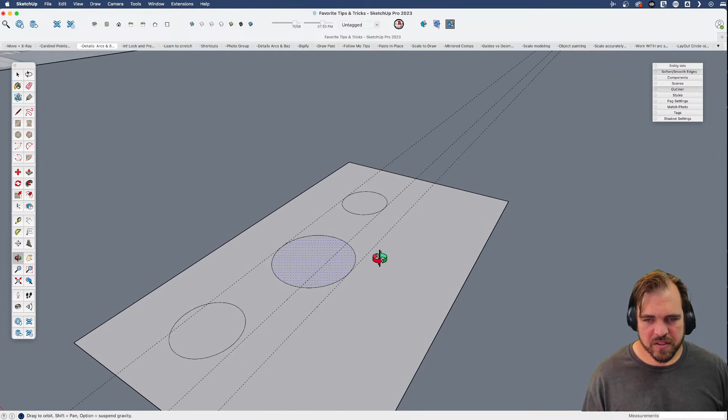This gets trickier once this is 3D, because here you might, if I scale and say okay, I want my guidelines—sorry, these guidelines are at 24 inches and 12 inches and such. In this case, when I select this and use the scale tool, I might pick this middle grip because I'm thinking of my 2D version, and press shift so it scales uniformly. But here we're warping the geometry outside, because by picking that middle one, even a little bit, it's going to mess up that surface it's attached to.

So keep in mind that in this case we may still be able to make this work by using some of the other scale grips. If I grab this one and press shift so it's uniform, because that other base is on my surface, I can now scale down to this edge. Except it's not snapping there, and that's going to bring up my next point.

We can make it do so, and I'm going to show two examples of this. Guides are awesome. If you've used guides a lot, you know that sometimes you can snap to them and sometimes you cannot. So we're going to explore when you can and can't snap to a guide.

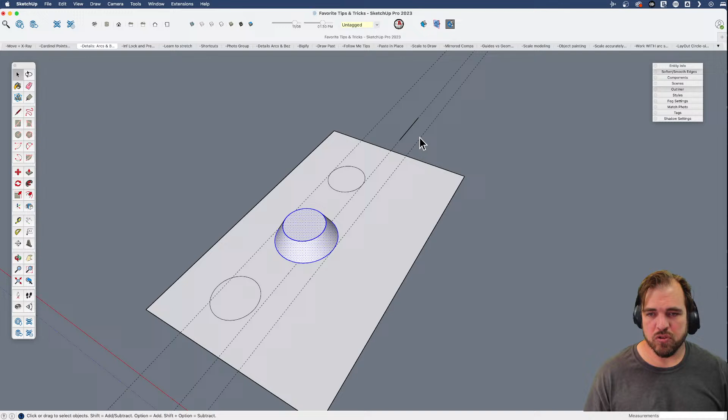But when it seems to not be working for you, you just need to draw some geometry on the guide. So in that case, I'm going to grab this, press the shift key, and then I will scale to...

You know what, I ran into this earlier too. Watch, I'll make it work. It'll still work, I need to draw a vertical edge. I think that will work. Shift. Oh, I thought it would work. Well, bummer.

This is why we do this live, for moments like this. I thought this would work for us. If this won't work, then... I just made this work the other day, I must have done it differently.

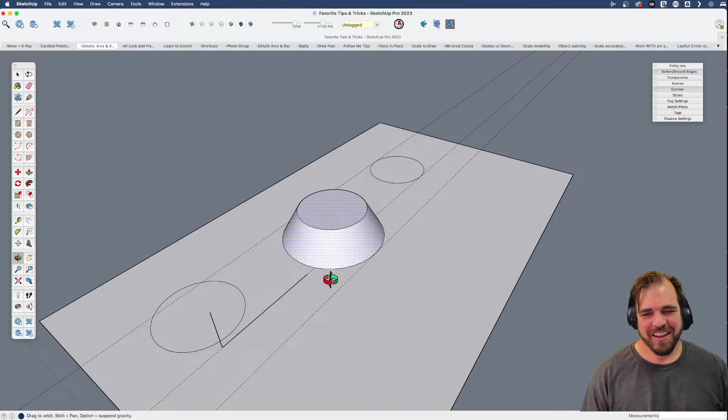Okay, bail out, bail out. Let's go back to this idea. Sometimes you can scale accurately using references, and depending on how you do it, it may or may not work well for you. Somebody said I might need to zoom into the line. Okay, we'll try that in a second.

The guides are awesome, right? If your guides are on the same plane that you're drawing on, you can snap directly to guides. I can snap to this guide.

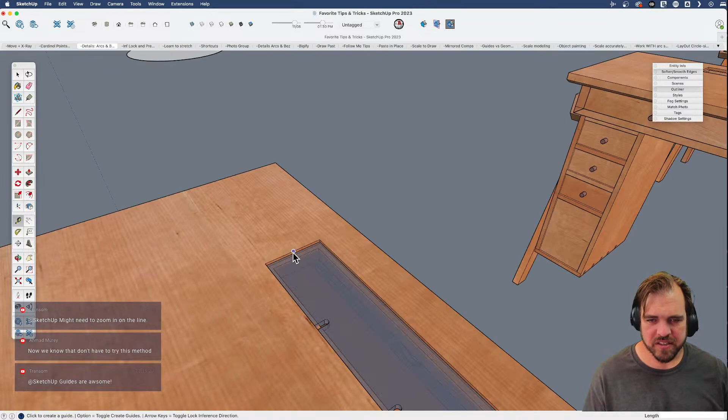But if I drew these guides, like I've got this little piece of tinted glass, but it's inset just a little bit, and my guidelines—I want this to be 4 inches in from each side here and here. It doesn't matter if this was higher or lower. Once your guidelines aren't on the surface you're trying to draw to, I can't snap to them. See how that's causing problems.

And if I draw a line, how far—it's not going to snap to that line. So sometimes your guidelines can be really helpful, but if you draw just a bit of geometry, that's when you can snap to anything, no matter if it's higher or lower. Whereas, like I say, guidelines, if it's not directly on the plane you're working on, you can't snap to them. Still useful—just remember, sometimes you need to create some little throwaway geometry.

To that point, another quick way to draw that I find just useful is the scale tool. Sometimes I don't want to create guidelines, so I will just draw a rectangle and use the scale tool to scale it to stuff that I know I need. So that's also helpful.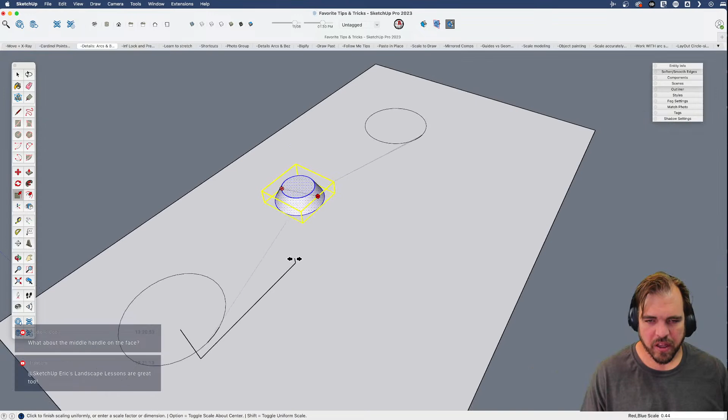I'll try zooming in, see if this works, or we'll try. I wonder if I need to select it like this either. That's funny, I thought I just got this to work the other day. So the setup might work under a little bit different finicky circumstances. Let me try grouping this.

Somebody says, what about the middle handle on the face? Either one—the middle handle on the face, that's in here.

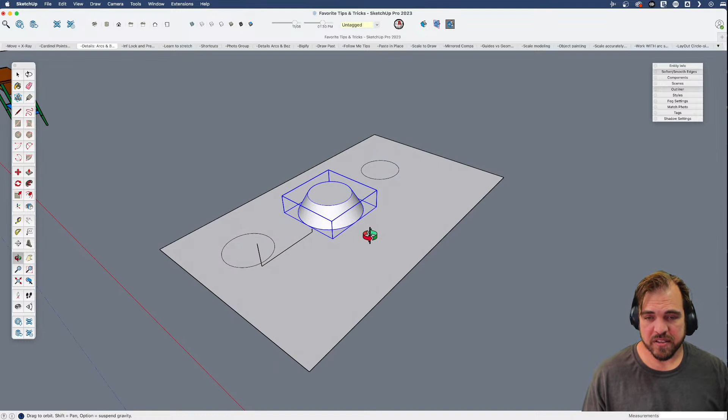Ideally, because I was trying, I just deleted all my guides. I was trying to preserve one side and scale the other one. So that's what I was trying to do. Let's not belabor it. I'm sure some of you out there could figure out a way to do that. But yeah, it's not impossible. The whole point being that the scale tool, if you create some guides, you can scale accurately in some circumstances. Leave it at that.

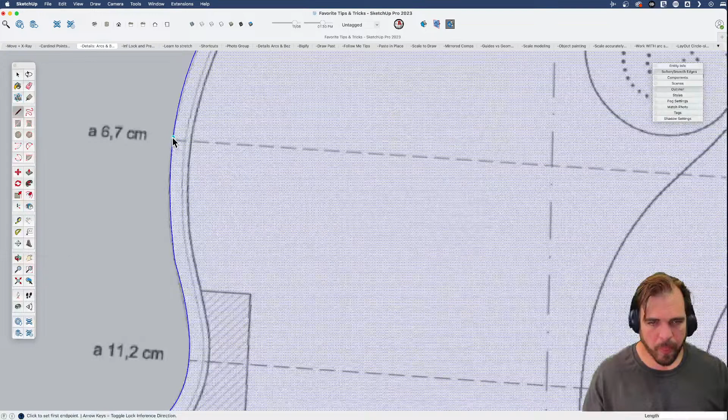And sometimes you'll bring something in like this, and I will model it really big, and then you need to scale it down. So let me create a line. So I'm going to group this, go in, edit it. Is this 6.7 centimeters? Measure that. 6.7 centimeters. Oops.

This is another one of those things going all the way back to when we were talking about the Wacom tablet. I could never get this scaling with the tape measure to work, because if I move my mouse right now, it sort of messes it up. You've got to be able to measure and let go. I could never let go of my tablet, the pen, and not mess it up. Yes, I want to resize that, and now I have a very accurate model. So resizing with the tape measure tool, definitely a favorite thing.

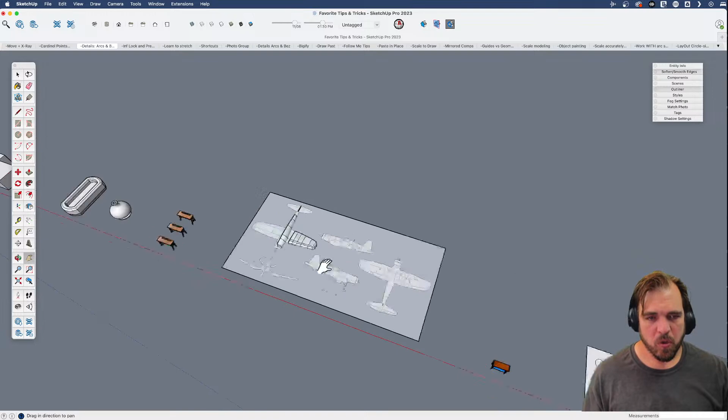Speaking of, I skipped this one over. I won't belabor it. I know most folks will know this one. We'll give Dave R the credit. It is generally known as the Dave R technique, Dave Richards technique, that you can take an object, and this might be a little box, a very ornate box that is only an inch wide. And if I try and draw arcs on this while it is only an inch wide, SketchUp is going to start balking at me. And if I try and use Follow Me or Intersect with Model or Solid Tools, SketchUp is at its core an architectural modeler. It likes larger scale.

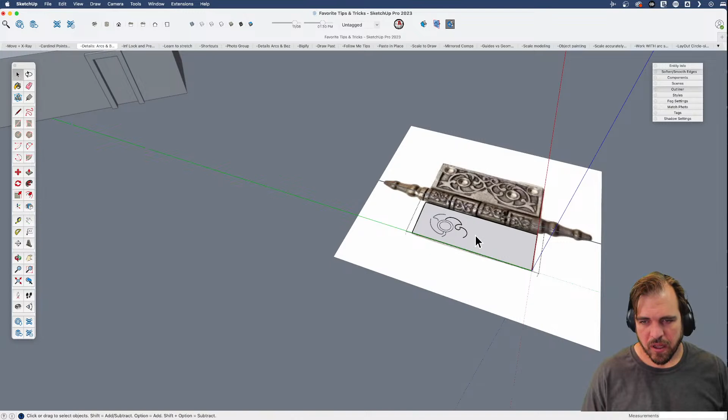So what we're going to do is make this a component. Oops. And we're going to do a couple things here that we just talked about. I'm going to take these edges, copy them or cut them, paste them in place. So I want to keep working on this. But I also know that the real scale of this should be only, let's say this is like a really small box hinge, 1 inch.

So I'm going to do a couple things here. This is still a component, and this is not necessarily how you would set this up, but just so that we can do this, I'm going to select this edge, this component, and I'm going to group them, not make it a component. And so right now I'm not editing the component, but I'm going to use that trick we just talked about. Measure this and make it 1 inch. And that way my component is down at this scale too.

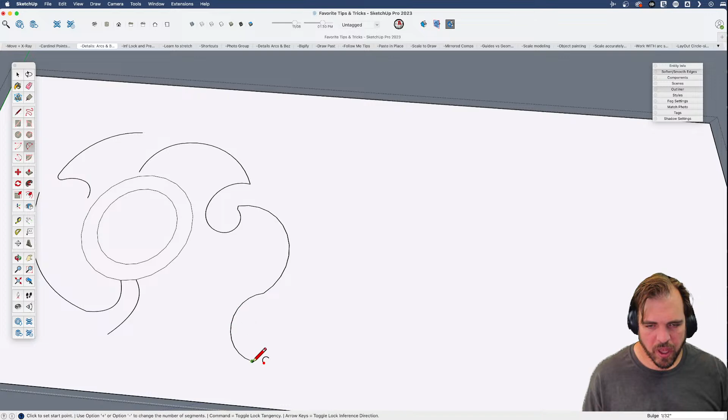And what we'd see at this scale is if I'm trying to draw arcs and I'm adding a lot of detail for whatever reason, it may start balking at me. Anyway, you have to say yes, yes. As we go farther and farther down that path, it would have trouble. But up here at this large scale, we have no trouble. We do what we want to do. Continue on our merry way, and at this small scale,

I set this up so badly. Is that it? I thought this was a component. I thought I had made it a component, but you know what? I don't ever remember the component dialog, so maybe I didn't. Now it's a component. The point being, doesn't matter. I can scale the outer thing, make changes, and it's going to happen on the small version.

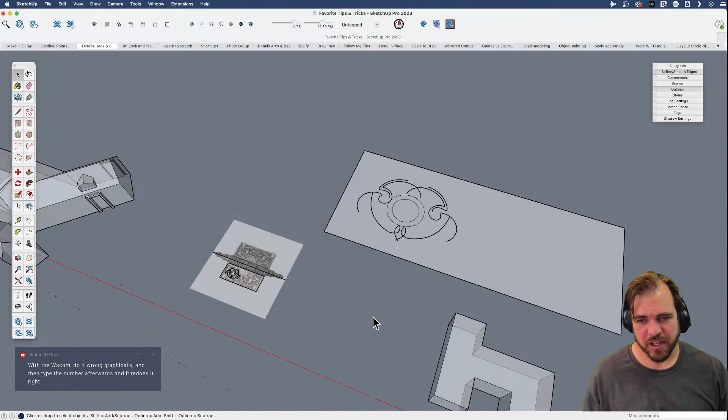So useful to draw. Yeah, somebody typed in the chat, do it wrong graphically, and then type the number afterwards, and it redoes it right. Yeah. Anyway, that concept, favorite technique. Again, credit to Dave R, I think, for propagating it most prominently. That you can take something, scale it up, make changes, and even though you couldn't make them directly on the small version, for whatever reason, you get all the detail on the tiny version as long as you make changes to a larger version of your component.

I think let's call it. I already said at the beginning, I don't really have a good example. Just embrace that SketchUp is made up of segments, segmented circles and arcs and stuff, and just work with that. Change the number of segments, and it works well. So yeah, I don't know.

I would love to hear a different spin on some of this stuff. Anybody have different ways that they approach some of these? Other suggestions for your favorite tips and tricks that you use in SketchUp?

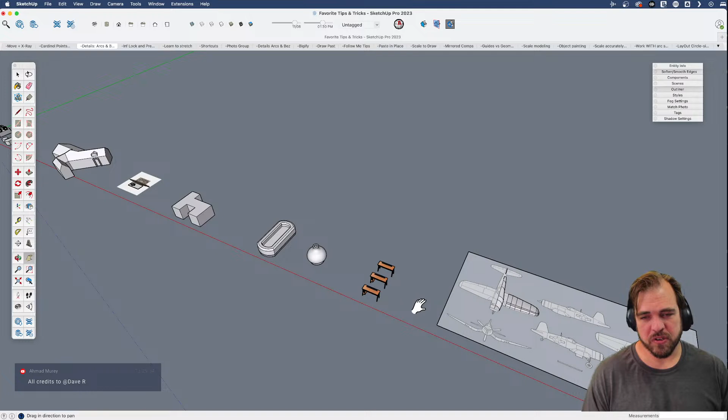La, la, la. All right. That was okay. That was like a hectic whole thing, but that was that. That was the idea for today.

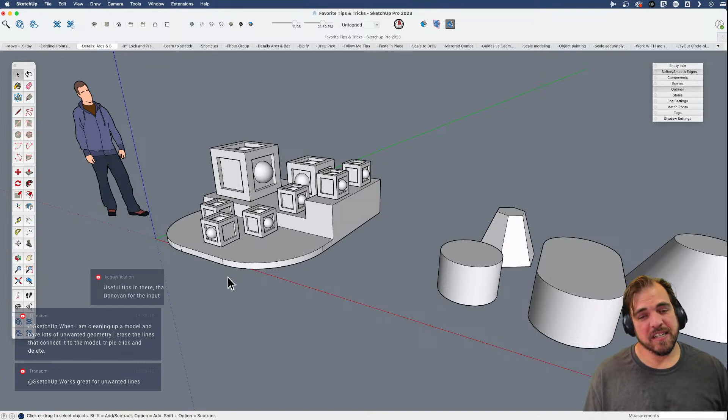Good question. I love a good furniture model. That's my bread and butter. You know what? Somebody brought up the lightsaber one. That one was a lot of fun. Aaron's done one. I've done one. Maybe we need to have Eric do one, like, what kind of version would he do? But it's always a fun topic to revisit. Yeah.

Kind of like the negative comments, sometimes those are the ones that stand out. Some of the best models that went well, the train model, some of the other object models or lamp or furniture models, they went well. The one I remember is, I tried to do this building in Mexico City and it went terribly. Why does that one stand out? Anyway, I'm done. So you seem to have more fun with the ones that go bad as opposed to the ones that are just kind of straightforward.

No, I don't have more fun with those. I'm just saying they stick out in your memory, the way sometimes negative comments have a way to grab you. I see. Like you'll get a bunch of nice ones. They stay with you longer. You focus on that negative one for no good reason.